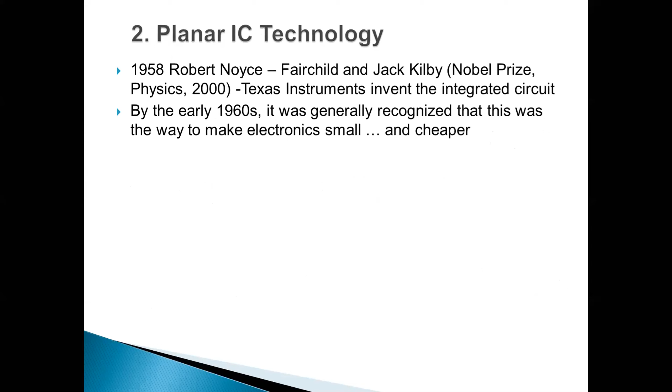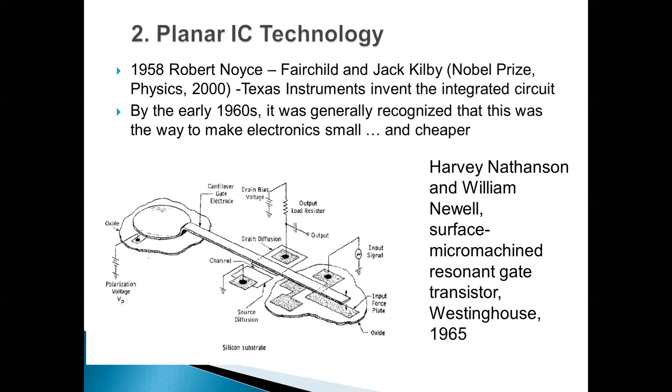Then came the technology - Fairchild and Jack Kilby at Texas Instruments invented the integrated circuit in 1958, and by the early 1960s it was generally recognized as the way to make electronics smaller and cheaper. Then Harvey Nathanson and William Newell created the surface micro-machined resonant gate transistor in 1965.

After that, MEMS didn't take off that much because people entirely concentrated on developing integrated circuits. The resonant gate transistor had poor on-chip reference frequency, and because the metal had very high temperature sensitivity and did not have sharp resonance, the quality factor of the filter made was very low.

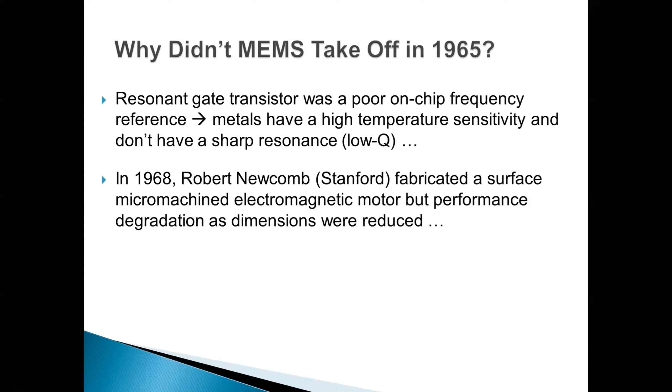Then at Stanford University in 1968, Robert Newcomb fabricated a surface micro-machine electromagnetic motor, but the performance degraded as the dimensions were reduced. There was also material incompatibility with Stanford's micro lab, because MEMS needed mechanical material and they were not much familiarized with the properties of silicon - that it would revolutionize the entire mechanical sensor or actuator industry. That was not known at that time, so the entire focus was on integrated circuits.

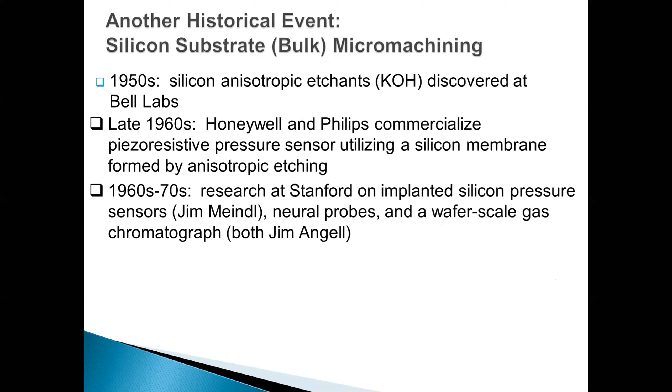In the 1950s, silicon anisotropic etchants were discovered at Bell Labs. In the later 1960s, Honeywell and Philips commercialized piezoresistive pressure sensors utilizing a silicon membrane formed by anisotropic etching. From the 60s to 70s, research at Stanford on implanted silicon pressure sensors, neural probes, and wafer scale gas chromatographs were developed by multiple research groups at Stanford.

In 1980, Kurt Petersen of IBM and ex-Stanford students Henry Allen, Jim Knutti, and Steve Terry helped initiate Silicon Valley's silicon microsensor and microstructures industry. So in the 1980s is when America actually started to really work on industrializing, or commercializing, MEMS structures.

Another historical event is the development of silicon bulk micromachining. That is, the bulk of the silicon is etched to realize the mechanical structure, and it was discovered. In 1990, silicon inkjet print became a commodity.

Then in the 1980s, the next revolutionary technology, surface micromachining, started up. Berkeley and Wisconsin University demonstrated the polysilicon structural layers and oxide sacrificial layers. That was the rebirth of surface micromachining. And once surface micromachining was identified to be the ideal technology for MEMS, there was no looking back, and it just grew from there.

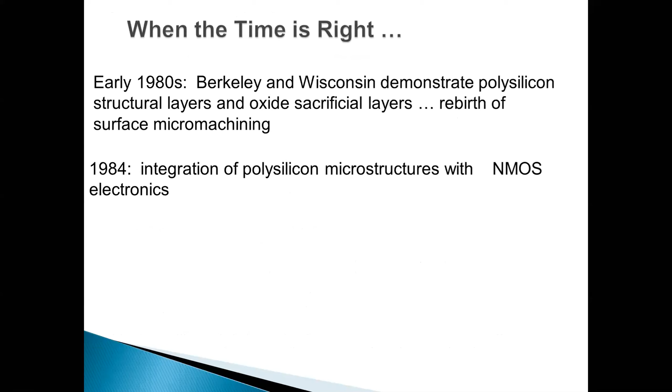In 1984, integration of polysilicon microstructures with NMOS electronics happened, because unless you couple with the circuitry, the signal cannot be processed.

In 1987, Berkeley and Bell Labs demonstrated polysilicon surface micromechanisms, and MEMS became the name used in the US. As you know, microsystems is the name people use in Europe, but MEMS is the name used in the US, and in India also we normally follow the name MEMS.

Analog Devices began the accelerometer project. I hope you all know that now the entire automobile industry, 90% of automobile accelerometer sensors, come from Analog Devices. In 1988, Berkeley demonstrated

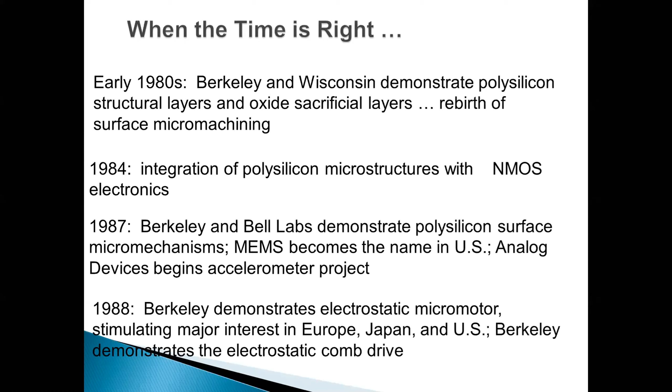electrostatic micromotors, stimulating major interest in Europe, Japan, and the US. And Berkeley demonstrated the electrostatic comb drive.

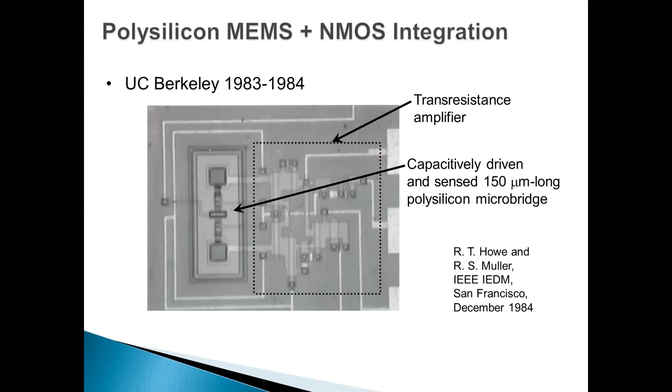Then the polysilicon MEMS plus NMOS integration happened in 1983-84. This was published in IEDM by 1984. You can see there is a trans-resistance amplifier, like a smaller version of an op-amp, and then capacitively driven and sensed 150 micrometer long polysilicon microbridge.

Then the polysilicon micro electrostatic micromotor was developed. Why it's called electrostatic, I'll come to a little later, because a motor which works on the electromagnetic principle on a macro scale becomes one working on the electrostatic principle when the dimensions are reduced. So that is why it's called an electrostatic micromotor.

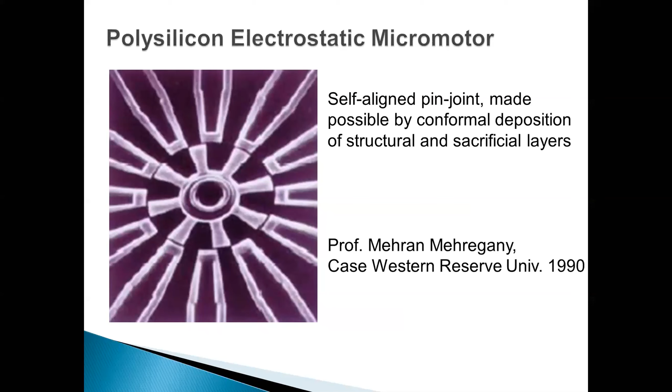Then comb drive resonators came up in IEDM in Washington DC in 1993. This was the structure that current accelerometers actually follow.

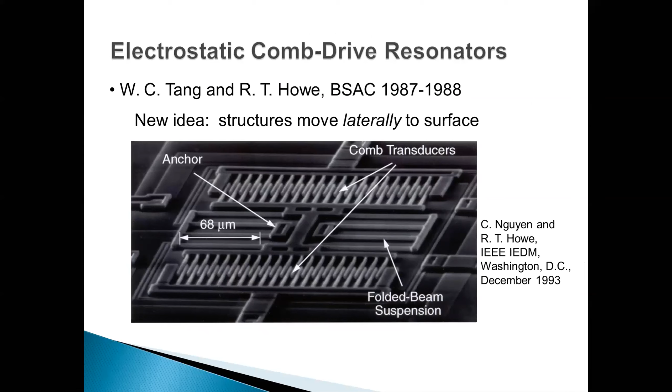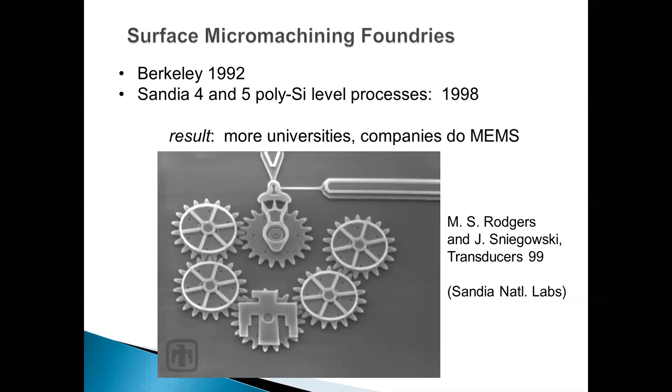devices came up, from Sandia, using a 4 or 5 level polysilicon process. This level means that 4 or 5 levels of lithographic processes were involved in realizing this MEMS.

Then in 1987, mechanical engineers moved towards MEMS, and they wanted to reproduce or recreate all mechanical sensors using this technology. DARPA supported large projects at many US universities until 2002, and commercialization of inertial sensors by Analog Devices and Motorola began from 1991 onwards.

The companies' revenue was hugely increased or multiplied. Then microfluidics started with capillary electrophoresis in 1990, and for bio, this actually paved the way for MEMS's entry into biotechnology.

Then optical MEMS also started from 1998 to 2002. So again, I want to take MEMS into nanotechnology, because whenever you talk about bio-MEMS, you want to actually synthesize or analyze particles of nano or Angstrom dimensions.

Richard Feynman in 1959 contended that it is interesting that it would be in principle possible for a physicist to synthesize any chemical substance that the chemist writes down. So the chemist says this is the property I want, and the physicist says, okay, this way you arrange the atoms and then you get it.

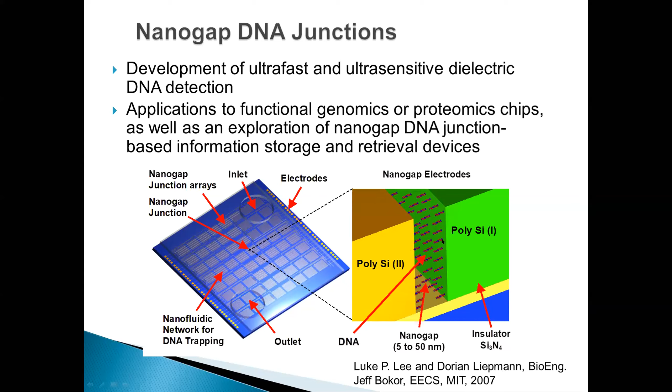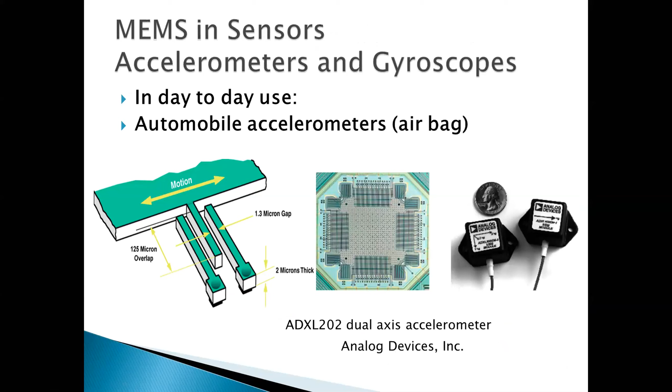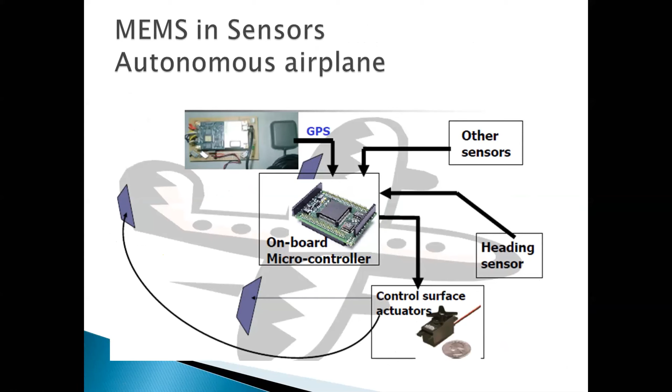This is a diagram of an analog devices accelerometer. Now in an airplane or any autonomous vehicle or automobile, you have an infinite number of sensors at every part. And then you have optical devices also, MEMS in sensing and encoders.

So the cantilever structure with antigen, the change in mass happens when these particles get deposited onto the cantilever beam. There is deflection due to repulsive forces, and the sensing can be done using optical sensing, capacitive sensing, or resonant frequency, since it is vibrating, and the frequency of vibration changes when this particle resides, because the mass moves by a few nanograms or micrograms.

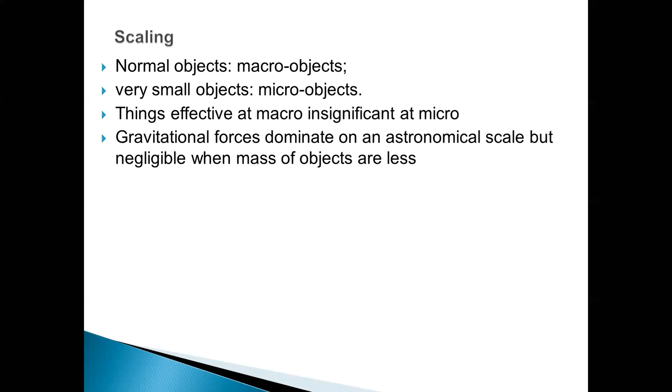The principles that are effective at macro scale become insignificant at micro level. For example, gravitational forces dominate on an astronomical scale, where the mass is so huge, but it becomes negligible when mass of objects is less. A normal electric motor works on electromagnetic force, but a micro motor uses electrostatic force instead of magnetic field, because of the structure and the variation of the distance between the stator and the rotor.

Regarding the time scale from conception to utilization: Volta and Ampere developed the basic concept of electricity, and it took around 100 years to build the generators and motors by Tesla and Edison. In contrast, the micro comb drive motor described in 1989 is used in automobiles as an airbag sensor within 12 years. So now the lab to shelf time, once a design concept comes, the lifetime to reach the actual working product to be sold to the market is just 10 years now, because of the advancement of this scaling technology.

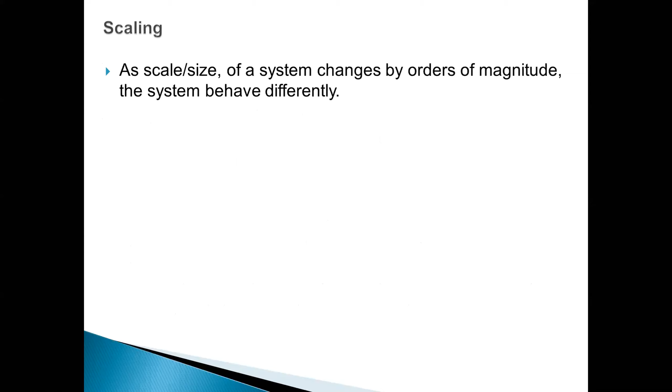As the scale or size of a system changes by orders of magnitude, the system will behave differently. I want to take one example: a glass of water about 5 centimeters. Assume in a glass of water you have water of height 5 centimeter. If you pour it onto a table, it runs off the edge without any problem. Now assume the height of the water is only 0.05 centimeter or 0.5 millimeter.

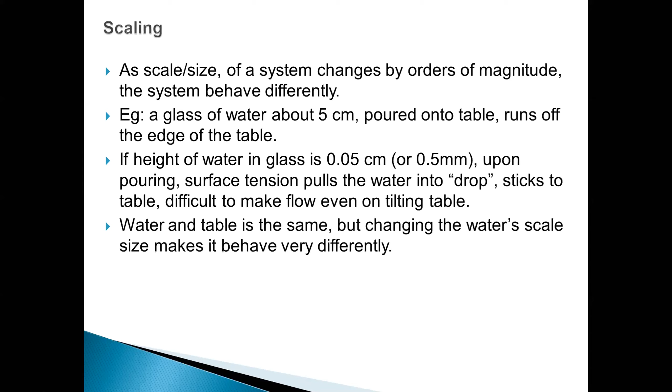Upon pouring, the surface tension pulls the water into a drop and it sticks to the table. Even if you tilt the table, it is difficult to flow, it just gets stuck onto the table. Water and table are the same, but changing the water scale size makes it behave very differently. Now imagine the size of water in the glass is only 0.0005 centimeter, that means in the micron level, that is 5 micron. Upon pouring, the drop will not even reach the table, air current will carry it away. So you have a glass containing 5 micrometer of water height, and you just pour it, that drop even won't reach the table, it will just fly away with the air. So the behavior of the water is dramatically different because of its size.

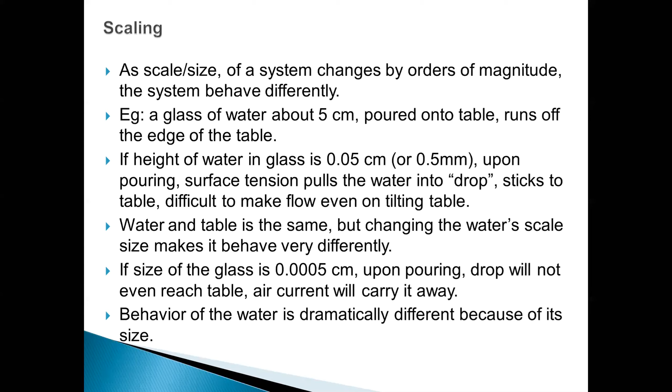This scale factor affects all dimensions of an object if you change it by S. For example, to realize any mechanical structure, you need length, width, and height. For a cantilever beam, you have a length, a width, and a height. If you see in independent houses, you can see the carports. A carport without a supporting pillar is an example of a huge mechanical structure of a cantilever beam. The same mechanical structure miniaturized into micron dimension is what the cantilever beam is in MEMS.

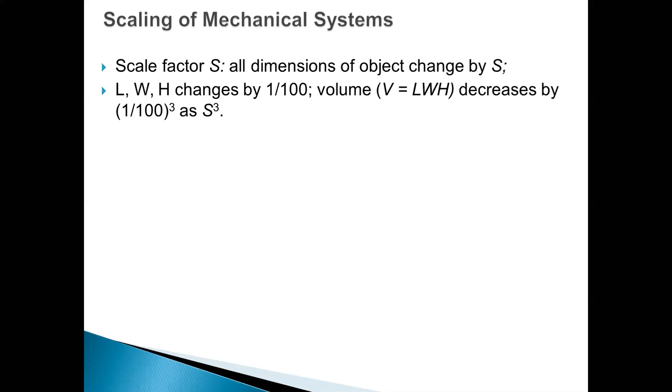Imagine the length, width, and height change by around 1 by 100. The volume actually decreases by 1 by 100 cube, that is S cubed. Now for force, you have multiple types: force due to surface tension, force due to electrostatic, force due to magnetization, force due to gravitation. You have certain formulae for each, like the distance or dimension between them: the dimension between the charges reduces, the dimension between the north pole and south pole changes, the dimension between two objects decreases, etc.

So how does the force decrease? Based on the fundamental formulae of force, the force due to surface tension reduces as 1 by S, electrostatic as 1 by S square, and magnetic as 1 by S... I mean S is 1 by 100, or whatever is the value of the dimension reduction, which means that if from 1 millimeter you reduce to 0.1 millimeter, it is reduced by 1 by 10.

That is the meaning. Gravitational force reduces as S power 4. So if size decreases from 1 meter to 1 millimeter, each of these forces reduces by 1 by 1000: surface tension force reduces by 1 by 1000, electrostatic force reduces by 1 by 1000 square, magnetic force reduces by 1 by 1000 cube, and gravitational force reduces by 1 by 1000 power 4. That is why we don't experience the force of gravitation as the object magnitude is less.

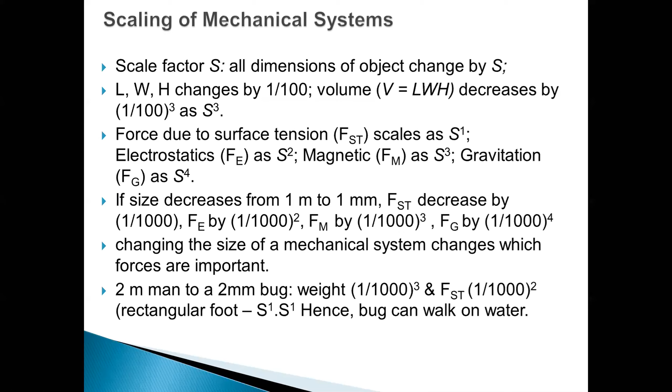Changing the size of a mechanical system changes which forces are important. So from a 2 meter man to a 2 millimeter bug, the weight is 1 by 1000 cube, and the surface tension is 1 by 1000 square. Assuming a rectangular foot, the bug can walk on water, but the human cannot, because of this principle of scaling - the forces applicable on a huge scale are no longer applicable on a smaller scale.

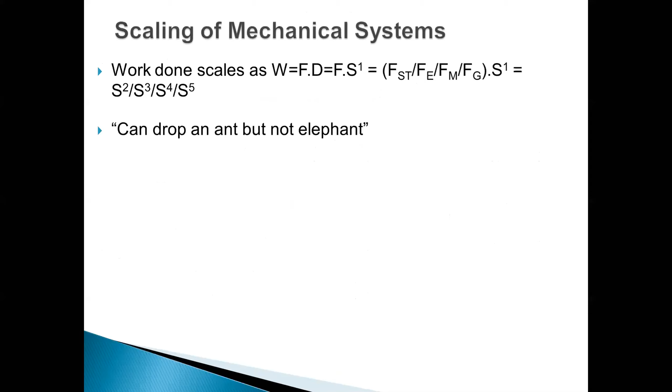So as an example, take work done, which is force into distance - each one scales by this. So we can drop an ant, but not an elephant. This is based on this same principle.

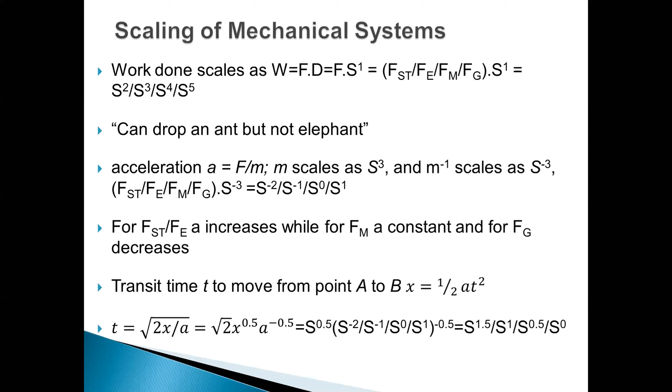I've cited a few examples: acceleration for surface tension force by volume increases, for magnetic force it's a constant, and for gravitational force it decreases. Transit time T to move from point A to B, x is half A T square. If you substitute the values of each dimension reduction, the total scaling effect is S power 1.5, S power 1, S power 0.5, S power 0. So this is what is important.

Why I've taken this example is that it's important to understand that whichever physics governs a macro system, when applied to a micro system, the effective forces applicable in that environment or boundary conditions might be different. An electromagnetic system at a macro level will be converted to an electrostatic system at a micro level. So someone interested in working on MEMS should always understand the basic physics or science behind each of these structures when these devices are miniaturized.

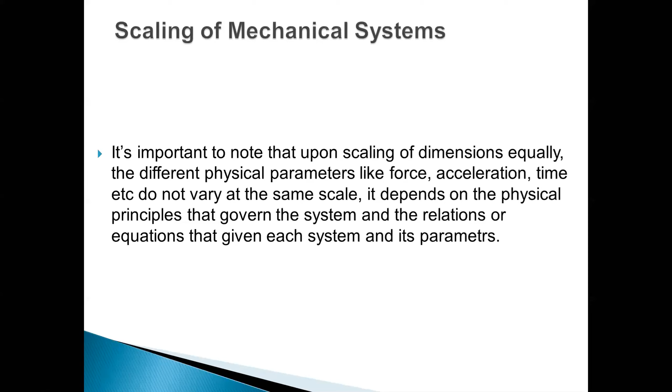It's important to note that upon scaling of dimensions equally, the different physical parameters like force, acceleration, time, etc. do not vary at the same scale. It depends on the physical principles that govern the system and the relations or equations that define each system and its parameters.

Since this is an introductory lecture, I just want to say that traditionally there are three technologies - this is from the Tai-Ran Hsu book - for micro manufacturing: bulk micromachining, surface micromachining, and the LIGA process. These are the fundamental three technologies used to realize MEMS devices.

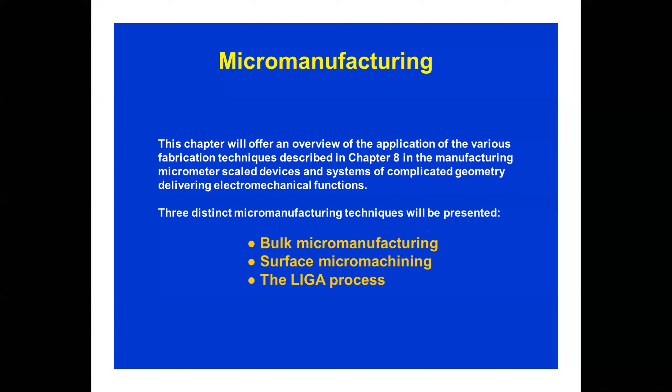I hope you all know that silicon has been identified as the major material used for MEMS, but there are other materials like lead, polymers, polycrystalline silicon, glass, and quartz. Based on the property you need - piezoresistive material means you can use silicon.

Piezoelectric material means you should use quartz. If you want an optical device, you may need to use glass or quartz. And if you want RF MEMS, you may need to use metals, because metals' resonant frequencies are much higher than silicon or polysilicon beams. If it is bio-MEMS, you should use biocompatible materials. So there are different materials for MEMS, but basically silicon is the most predominant material.

Irrespective of the material, most of the technologies used for realizing MEMS structures actually come from or are borrowed from VLSI technology. That is why designers don't want to replace the entire VLSI lab for another material. So to the extent possible, they always try to realize MEMS structures with some silicon inside. But if that's not possible, they may use some other material. In most cases, the basic or structural substrate material is normally silicon.

Surface micromachining normally is realized using polycrystalline silicon as the structure used to sense or actuate the mechanism, whereas in bio, it will be like the antigen or porous silicon or different types of material. Basically, most of the technology applicable for silicon electronics are also applicable for MEMS, but a few differences are there, which is what we are citing here.

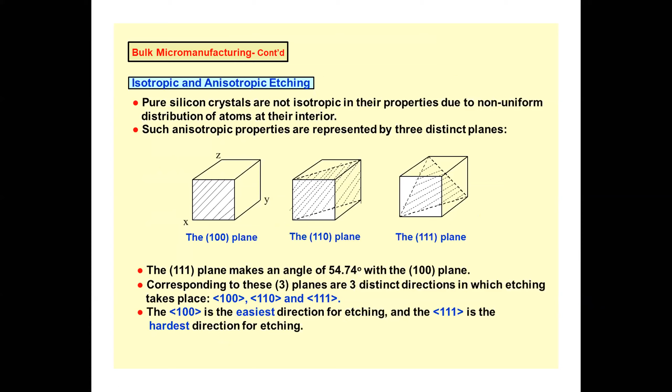Dry etching uses plasma to remove materials at the location of the substrate. As I said, silicon has different planes, and the number of atoms in each plane is different, so the distance between the parallel planes in each orientation is different. Basically, the mechanical properties are also different, because the number of atoms arranged in each of the planes are different, and silicon is anisotropic in nature. So wet etching of silicon actually introduces some angle; you can't get an exactly vertical groove in silicon if you do chemical etching.

If you do dry etching using reactive ion etching or plasma etching, it is possible to create vertical groove structures. Anisotropic etching is easier to control in terms of the etched shape, but the disadvantage is that the etching rate is about 1 micrometer, and it is temperature limited; at elevated temperatures the etch rate becomes uncontrollable.

The wet etchants normally used are HNA, KOH (potassium hydroxide), EDP (ethylene diamine pyrocatechol), and TMAH. Most etchants are used with a 1:1 ratio. For silicon (100), there is standard data on what etchant gives what etch rate, available in the literature, either in textbook form or in papers.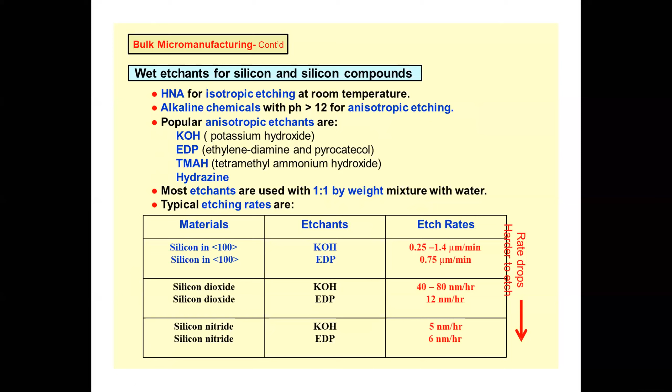Researchers normally have to refer to this data and standardize it at their own lab before starting the process. There's also a selectivity ratio—the etching rate of silicon versus the etching rate of the material used with the same etchant. Sometimes a material bought from one vendor is standardized, but next time you get the chemical from a different vendor, you may have to standardize it again, because the purity or molarity of the material may vary from vendor to vendor. So even though there is standard data, a designer or researcher always has to standardize or calibrate these processes before realizing the structure.

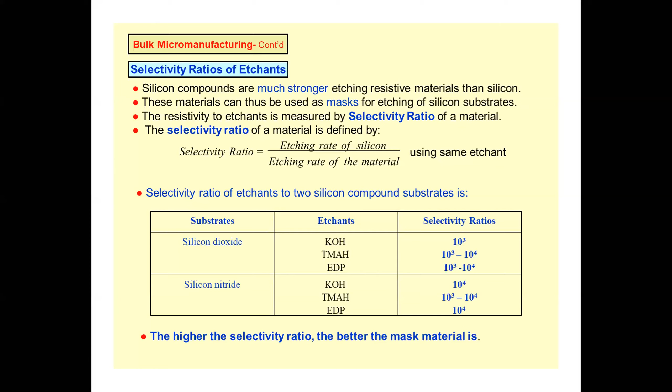So people use an etch stop technique. This is like an electrochemical etch stop technique, where etching reaction happens, but there is another material on which etching cannot happen, so that layer acts as an etch stop layer. Here you can see the red color etching penetrates into the p-type silicon, but behind that there is an n-type layer, so when it reaches the n-type, the etching stops. You can also create different doping concentrations where etching will stop. So there are different techniques by which people can stop the wet etching.

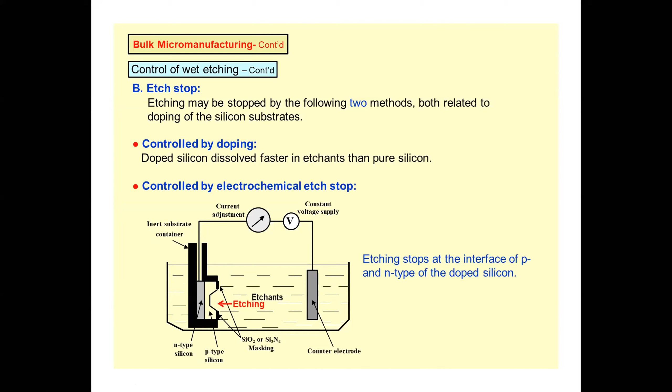Now coming to dry etching, there are multiple techniques: ion etching, plasma etching, reactive ion etching. Plasma is a neutral ionized gas carrying a large number of free electrons and positively charged ions, which are bombarded onto the material where etching has to happen. There will be a protective layer that protects the area which should not be etched, so the unprotected area gets etched. This is a symbolic diagram showing a side wall, and these ions are bombarded onto this.

This gray thick mask protects the area beneath it. Even though ions bombard the surface, they sit inside the mask area and do not reach the etching surface. Whereas the unprotected area gets etched by the RF plasma.

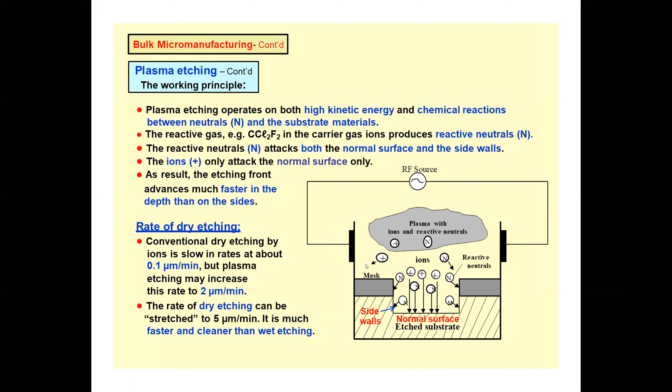Then comes deep reactive ion etching, where the dimensions are relatively very narrow. If you want nano type dimensions, one has to go for deep reactive ion etching, and you will get very fine nanostructures possible with this technique.

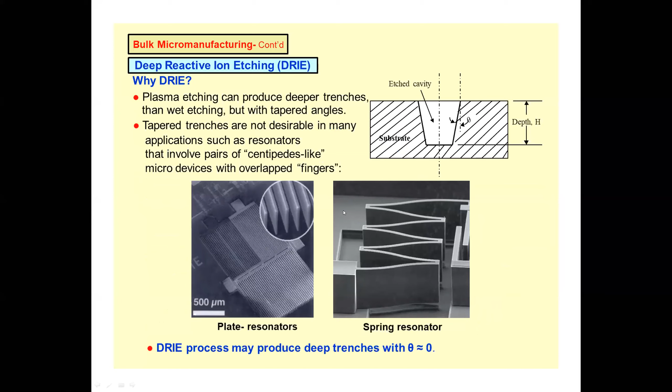The principle is like MEMS structures with aspect ratio of around 30. It is possible to create virtually vertical walls of theta plus or minus 2 degrees. DRIE is capable of doing that.

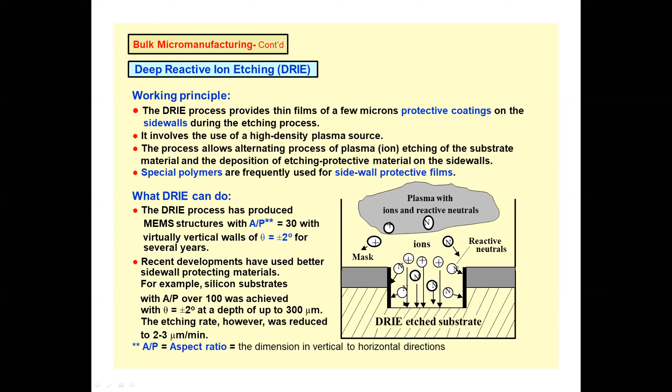You can actually get vertical comb layers using DRIE.

Quite recently, DRIE with better sidewall protecting material achieved, on a silicon substrate, an aspect ratio over 100 at a depth of 300 micrometers. Normally only LIGA would be capable of realizing this type of vertical structure, but with DRIE, because it is deep etching, you can create aspect ratios of 30:1 for polymer, 100:1 for photoresist, and 200:1 for silicon dioxide. So you can create much better aspect ratios.

If you compare bulk micromachining techniques, wet versus dry, they have different properties like directionality, masking material to be etched, cleanliness, operational parameters, and control of etch rate. These are different parameters one can look at.

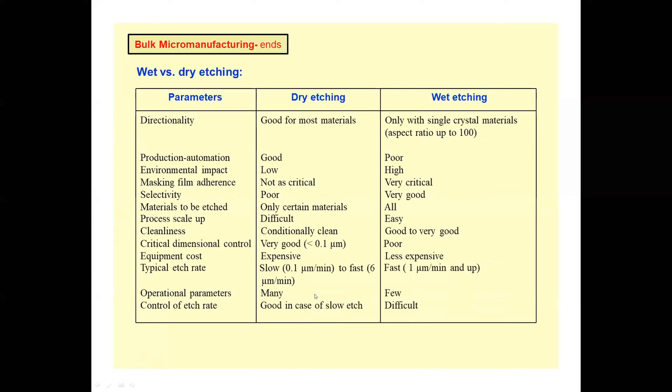The other technique used is surface micromachining, where you create structures on a structural layer deposited onto the substrate material. This added material may not be the same as the substrate material, which gives the flexibility of using different materials.

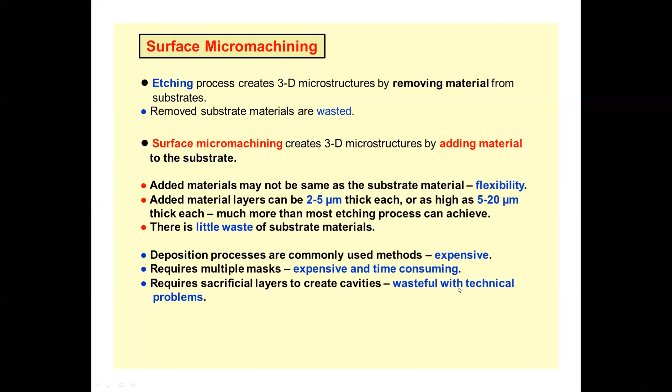It can be as thick as 2 to 5 micrometers, or as high as 5 to 20 micrometers. There is little waste of substrate material, whereas in bulk micromachining, bulk of the silicon is actually removed to realize the mechanical structure. Here, that is not the case. The deposition processes commonly used are expensive, requiring sophisticated techniques and equipment to realize these structures.

The most commonly used sacrificial layer materials are phosphosilicate glass, silicon dioxide, or boron phosphosilicate glass. For the etching process, there are formulas like 1:1 HF:H2O or 1:1 HCl:H2O, combined with deionized water.

For CVD, chemical vapor deposition, grown silicon dioxide, if densified at 1050 centigrade for 30 minutes, you get a lateral etch rate of 0.6 micrometer per minute. Whereas for ion implanted silicon dioxide, it may be 0.83 micrometer per minute. For phosphosilicate glass, PSG, you get 1.13 micrometer per minute. For BPSG, boron phosphosilicate glass, you may get 4.16.

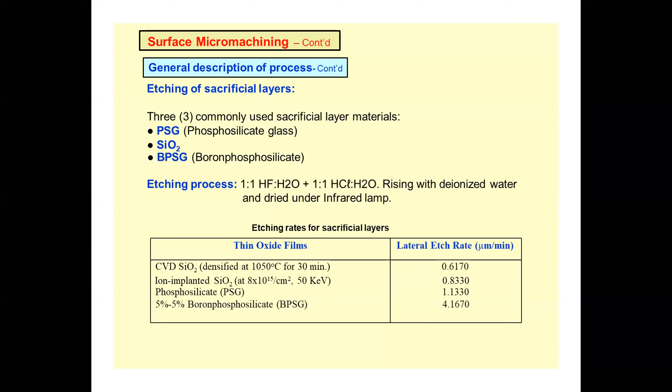So based on the material used and the technology or technique by which these materials are deposited, the etch rate may differ. The designer has to look into these standard data as well as optimize the data with respect to their own labs.

Coming to some problems encountered while realizing surface micromachined devices: peeling off can happen if the adhesion between the deposited material and the substrate is not good, and the beam can get peeled off. There can also be severing because some other material or an air gap can get trapped inside, creating shear stress.

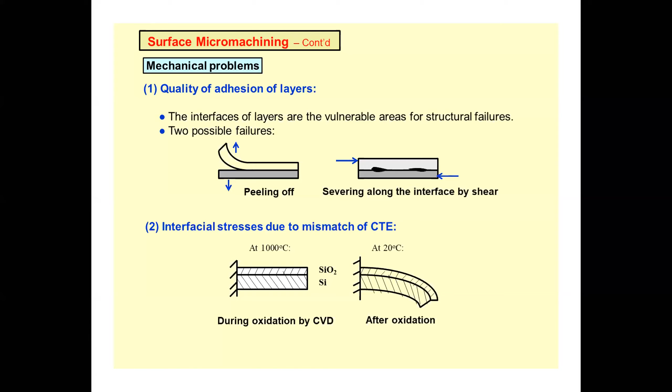Then there are interfacial stresses due to mismatch of the coefficient of thermal expansion, CTE. Deposition may happen at 1000 degrees centigrade, and silicon and silicon dioxide have different coefficients of thermal expansion. So when temperature is reduced from 1000 to 20 degrees centigrade, the contraction in silicon will not match the contraction in silicon dioxide, causing bending after oxidation at room temperature. This also may create problems in surface micromachined devices.

Hello, am I audible? Yes ma'am, you can proceed now. Yes, because I saw a message that my connection has some problem.

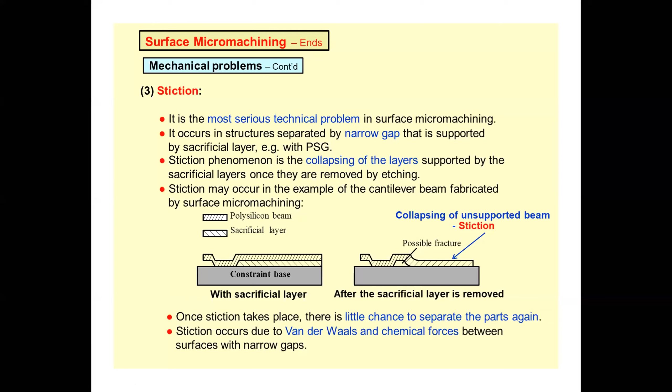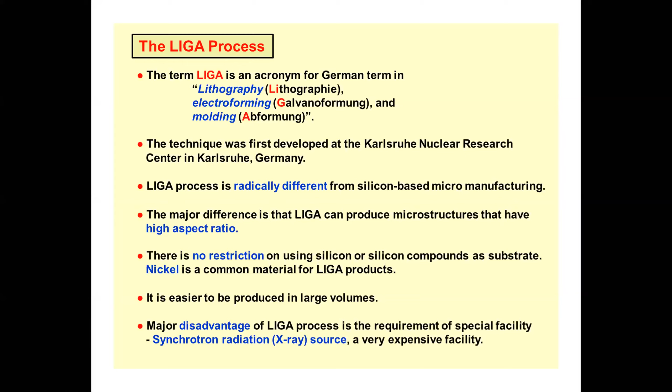That is why. So the last technique used for realizing the MEMS structure is LIGA: lithography, electroforming, molding. This is a German acronym, used to create huge aspect ratio mechanical structures in miniaturized form. This was developed at Karlsruhe Nuclear Research Center, and it is radically different from silicon-based processes, being basically a mechanical molding process. There is no restriction on materials used for LIGA, and it can be used for producing large volumes. The only disadvantage is that you need synchrotron radiation because it has to go through a deep layer.

So deep X-ray lithography provided by synchrotron radiation, then photoresist with the desired patterns. You should have electroplating of metal or metals, and you create the form, and then you create the original mold.

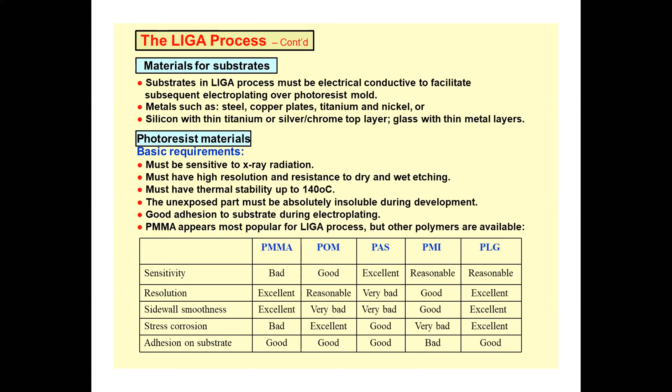Photoresist must be sensitive to X-ray radiation, and there are different materials used here, with properties of each given. There are very few labs working in India on LIGA, because in India, whether it is IISc, IIT Bombay, or IIT Madras, people basically work on bulk or surface micromachining only. We have not been into the LIGA process so far, to the best of my knowledge.

So the summary of micromachining: bulk micromachining is the least expensive for microstructures with simple geometry, but it is limited to low aspect ratio. Surface micromachining requires deposition techniques for structural layers and multiple layers of lithography, and etching of sacrificial layers is very complex, where stiction, warping, and collapse all happen. You should be very careful, as the process is tedious and expensive, with interfacial stress and stiction possibly occurring. That is the issue with surface micromachining.

The LIGA process is the most expensive due to initial capital cost, requiring a synchrotron radiation facility, but its advantages are virtually unlimited aspect ratio, and irrespective of silicon, any material can be used. So based on the requirement of the structure to be realized, people can actually choose any of these devices for realizing MEMS.

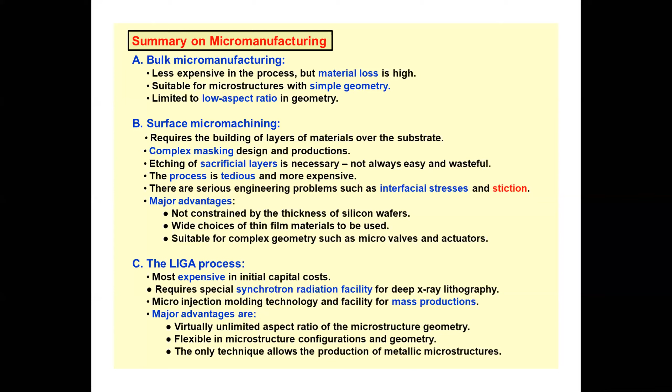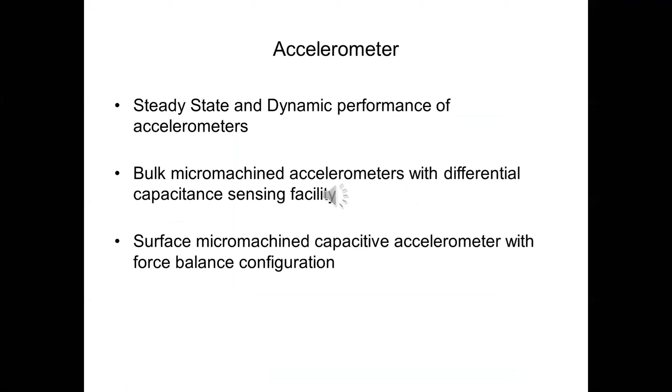I just want to go through the accelerometer, just to give you a flavor of how a mechanical structure is realized, and how we can signal condition it. So, steady state dynamic performance of accelerometer, bulk or surface micromachine.

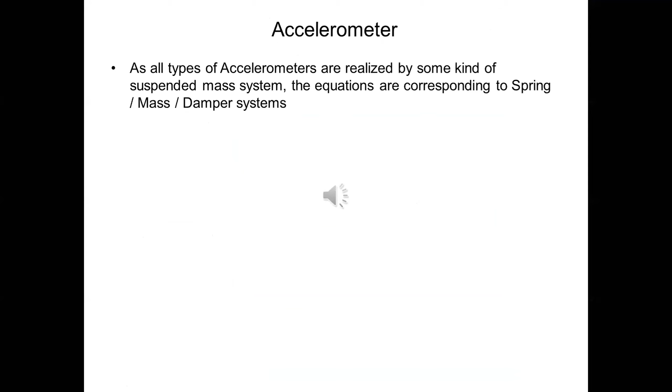All types of accelerometers are realized by some kind of suspended mass system, and the equations correspond to a spring mass damper system. Those who have studied control systems are familiar with this, where you have a suspended structure and a mass, which gives a force. The steady state condition is that restoring force will balance the inertial force, that is F equals ma equals kx.

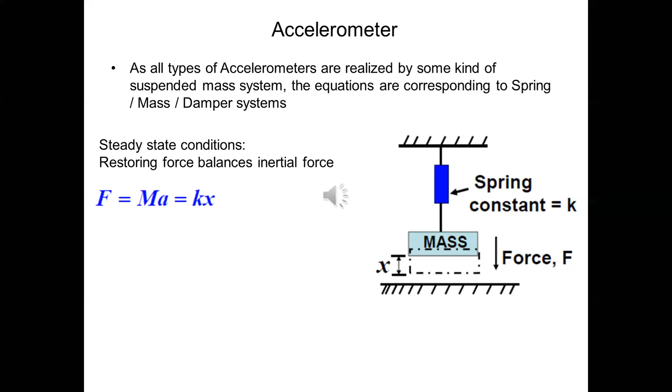So if you want to find the spring constant of the system, it is just ma divided by x, and the sensitivity is x divided by a. The value of k, the spring constant, will depend upon the Young's modulus of the beam and its dimensions - width, height, length. The displacement x, how much the beam can vary, is a measure of the sensitivity. Higher mass results in higher sensitivity, and higher spring constant makes it stiffer, resulting in lower sensitivity.

This is a diagram we developed when I was working at IIT Madras - the MEMS group had developed this system. Three structures are shown here, with different beam dimensions. You can see the accelerometer is made up of a structure with hollow holes inside, so the mass of the system can vary.

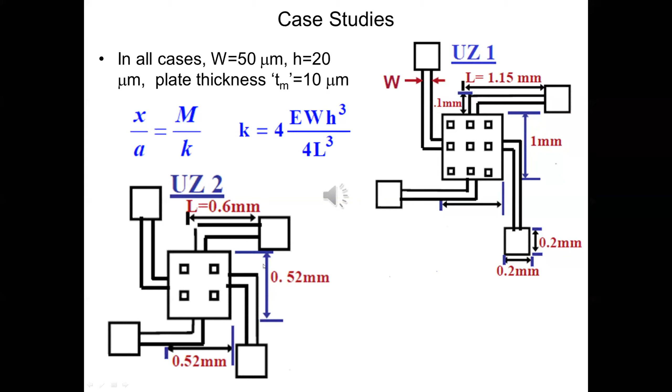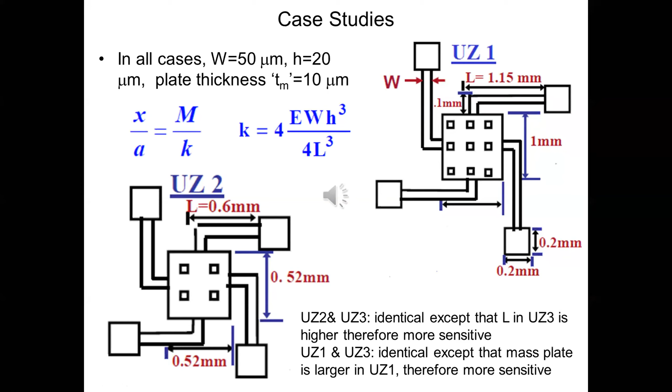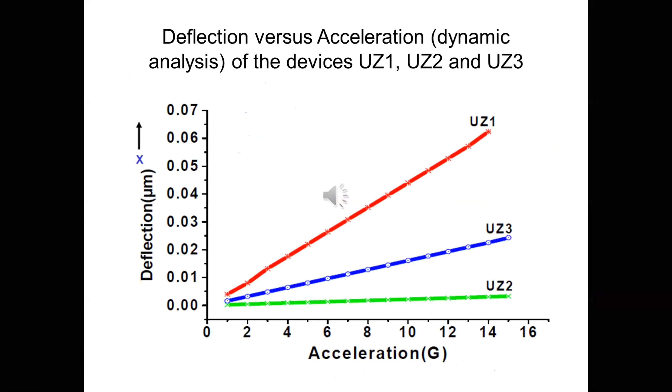So when in ANSYS you simulate the deflection in X versus acceleration, you get 3 different characteristics, where UZ1 shows maximum deflection. Let me go through that.

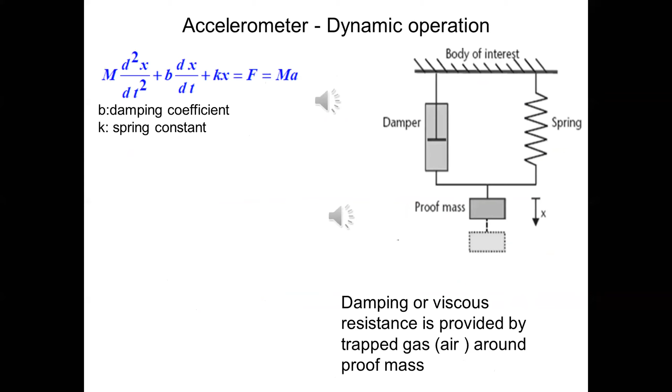This is because it's a second order system - you have to work with the fundamental differential equation, with external force applied, where B is the damping coefficient and K is the spring constant, converting into S domain and equating with the standard second order S domain equation. You get the steady state condition, resonant frequency, quality factor, and damping ratio - all derived from the values of B, M, and K. These can be developed based on the dimensions of the beam, and the sensitivity is measured using X by A.

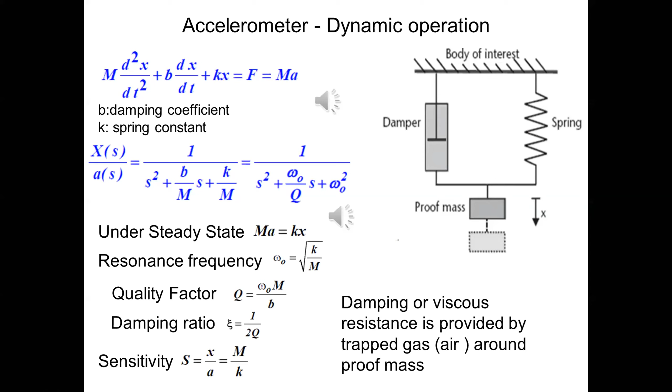Now, if you relate an electrical and mechanical system: mass M corresponds to inductance L, damping B to resistance, spring constant K to capacitance C, and the resonant frequency is root of K by M, or root of 1 by LC, and quality factor is omega naught M by B, or omega naught L by R. So people from an electrical background can easily compare this mechanical system based on resonance behavior.

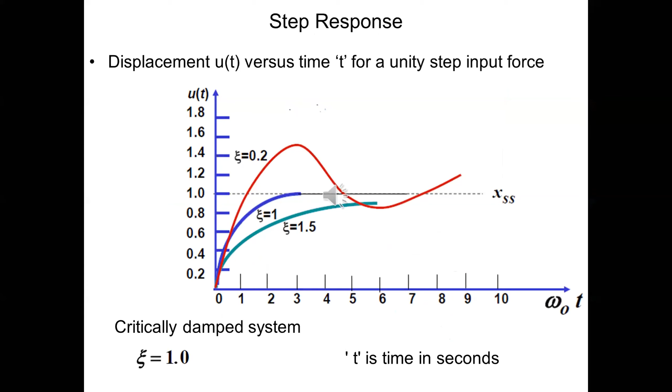If you see, the critically damped system will reach steady state fastest with xi equal to 1, whereas when xi is less than 1 or greater than 1, you get underdamped or overdamped situations. Based on that, using simulation, you can optimize the values of beam length and mass.

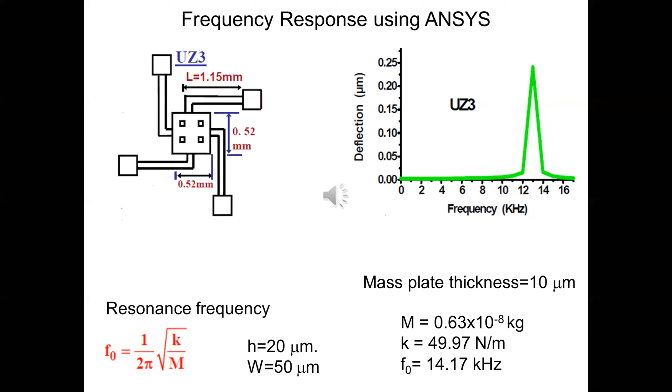So by changing the beam length, height, width, as well as the structural dimension of the structure, we can come up with different values of resonant frequency required for different purposes. So you can imagine that an accelerometer fixed on an auto rickshaw will not be same as that required in a bike, which will not be same as in an aeroplane.

Because the vibration of the devices are different, we should be able to devise or design different types of accelerometer structures based on the requirement. So this is a bulk micro-machined accelerometer structure based on differential capacitance sensing and force balanced operation. I'll just briefly say that also.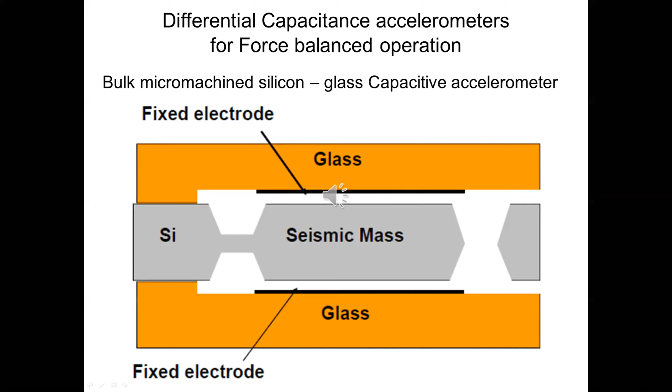So there is a glass plate on both sides, and you have two electrodes, and this seismic mass, which is also having a conducting layer, will move up and down between them. This is just a symbolic diagram of that.

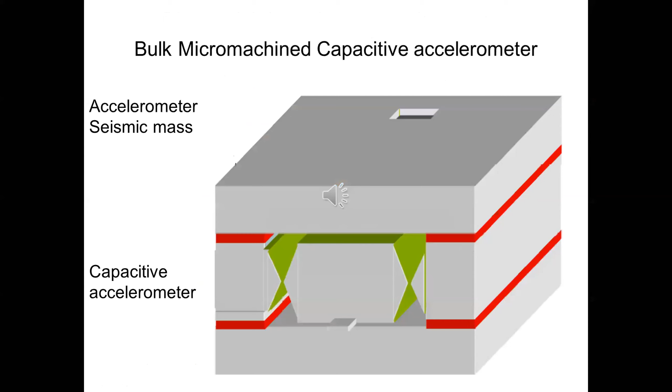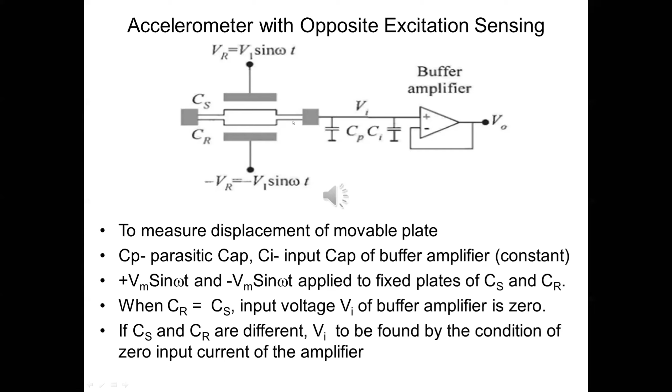When CR equals CS, the input to the buffer amplifier is 0. When CS and CR are different due to deflection, there will be a non-zero input, but since this is an op-amp, it draws zero input current. So assuming the KCL condition, Kirchhoff's current law, we can write the KCL equation, and then find out what is the value of VI created at the input.

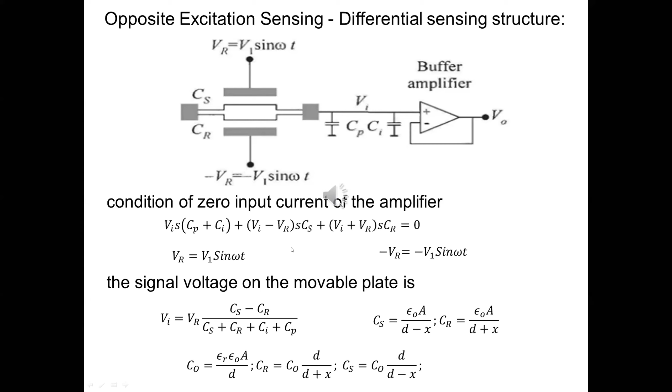And we find a normalized capacitance when no deflection is there: what is the value of CS and CR. Then CS and CR can be expressed as C0 into D by D plus X, and C0 into D by D minus X. Doing some manipulation, you get VI equal to 2 C0 X by D, divided by 2 C0 plus CI plus CP into 1 minus X by D whole square, where X is the deflection between the movable plate and the fixed plate.

Now we see that this expression actually depends on CI and CP, which is the input and parasitic capacitance, which is bad. No measurement should depend upon the internal condition.

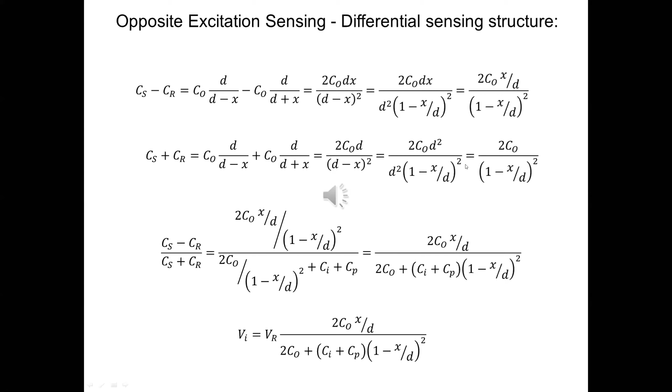So to remove that, people actually use feedback. This is an amplifier with feedback. Once you do that, the equation actually varies. Again, you go through the same op-amp conditions.

You see that because of the presence of the high gain amplifier here, AI, which is inverting in nature, and there is feedback, this feedback voltage will actually result in cancellation of AI. So now the V0 value will have only C0 and CFB, the feedback capacitance. There is no CI and CP.

The CI and CP will get vanished, not by neglecting, but because of the presence of this huge AI at the denominator. The value of CI and CP will get eliminated. So the value of V0, the output, will become depending only on the normal capacitance and the feedback capacitance.

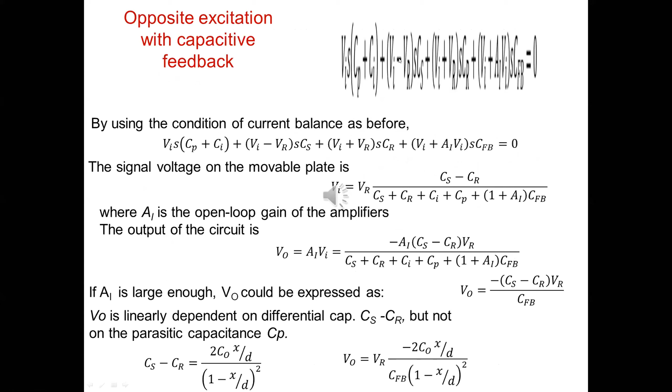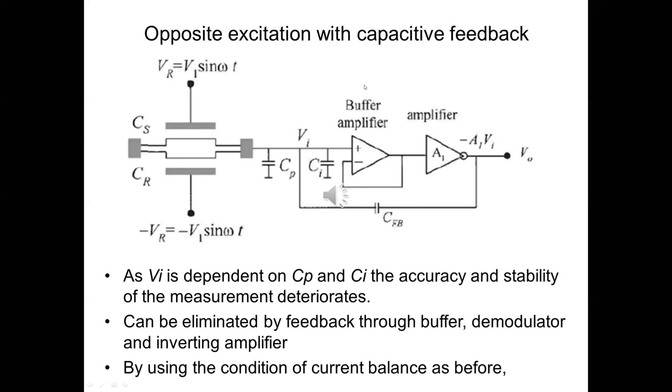Now this opposite excitation with the capacitive feedback, if you replace this CP and CI, the elimination of CP and CI from the expression will improve the accuracy and stability. That is done by a force balanced principle, where CFB is replaced by an RFB, a resistor.

Then if you superimpose a DC along with an AC, this demodulator acts on the AC and only DC is fed back, so that the movement will be balanced by the DC that is fed back, and that DC is an effect of the difference between these two.

So what happens here is that there is an electrostatic force due to the movement of the movable plate, converted to an equivalent capacitance change, a voltage here. The DC part alone is taken and fed back, and the same voltage is used to compensate the mechanical force.

So this electrostatic force and compensation with the mechanical force is why it's called force balanced sensing. The demodulator is between buffer and amplifier to derive the DC. As VFB changes the electrostatic force between the electrodes, the feedback is electromechanical in nature, and the capacitance is not measured electrically but through electromechanical operation, which is why it's called force balanced principle.

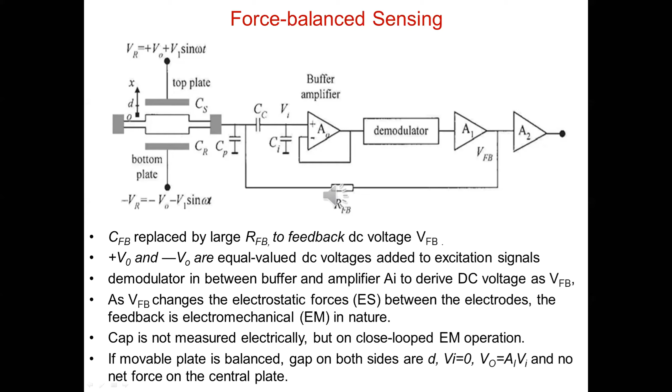If you continue with the same procedure of writing the equation, finally you get X by D V1 sin omega t. The movable plate moves up and down, and with the open loop gain of this amplifier A0 and demodulator A1 being very, very large, you get a perfect operation.

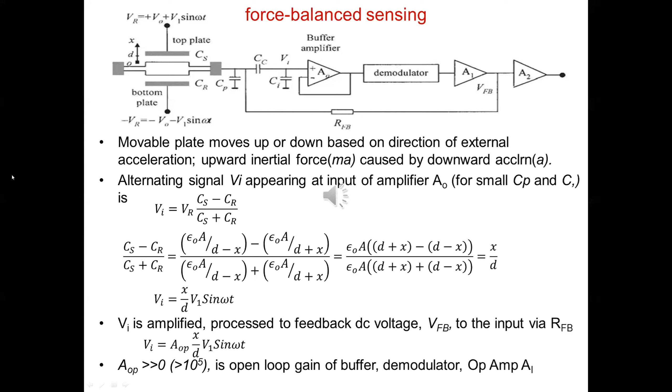So positive DC voltage at the central plate differentiates the electrostatic force. Net electrostatic force caused by the feedback is negative. So the displacement, this technique is referred to as force balance sensing technique.

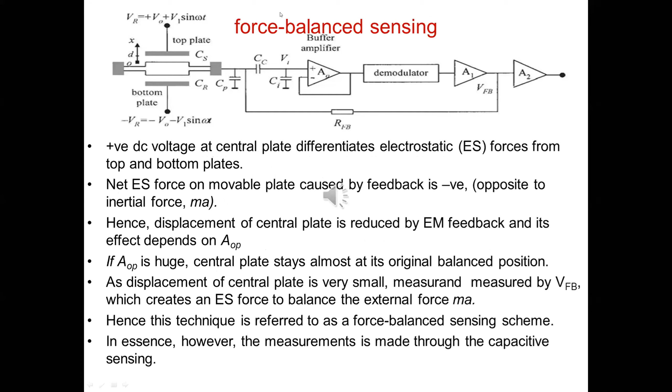In a sense, the measurement is made through capacitive sensing. In a parallel plate capacitor, the work done or energy stored is F into D, which is half Q into V. You equate these two fundamental equations, you get epsilon 0 epsilon r A V square, and then you get the electrostatic force, and this force will be used in the differential equation to find the displacement x.

So this is just for anyone who wants to work in or who is already working in MEMS. I wanted to show that after realizing the MEMS structure, unless it is integrated with circuits or electronics, you cannot develop the system. After integrating with the system, you come up with the force equation, put it in the second order differential equation or the S domain equation, and based on the dimension and spring constant, you can find the values of K, M, etc., and then solve it. So with that, I come to the end of the discussion.

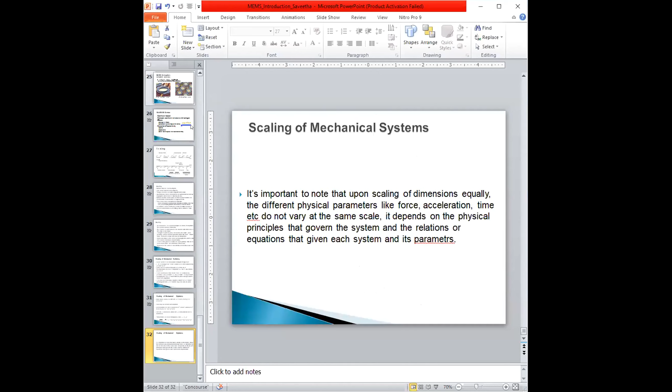Yeah, okay ma'am, but it was really useful and you were able to get a lot of information through your session, ma'am. Thank you so much, ma'am.